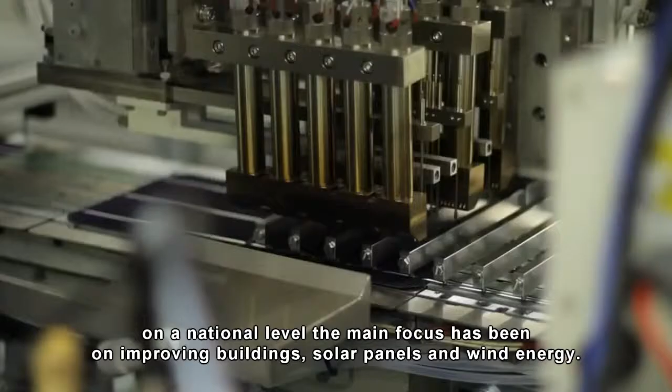In line with the Europe 2020 strategy, many local authorities made agreements to become energy or climate neutral in the future. However, as well as in Europe, on a national level, the main focus has been on improving buildings, solar panels and wind energy. The field of blue energy remains quite unexploited.

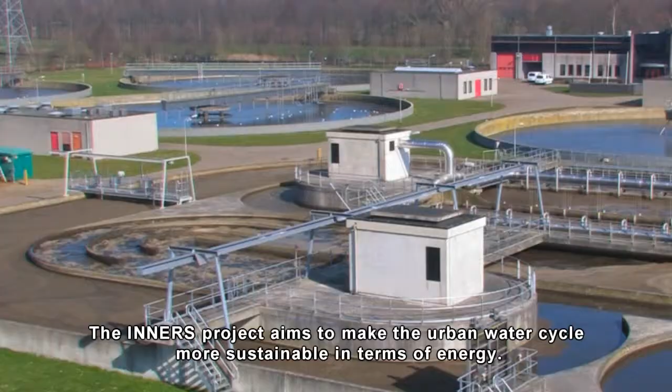The INNERS project aims to make the urban water cycle more sustainable in terms of energy. The project shows the potential of this new source of blue energy and helps to enable the water sector to deal with future challenges, such as diminishing fossil fuel sources in Europe, increasing energy prices, and stricter carbon emission limits.

The partners in INNERS started several projects to work on four main questions. What's the energy potential of the urban water cycle? How to recover heat? How to reduce energy consumption and how to reuse energy. And last, how to make the transition towards a new perspective on the urban water cycle.

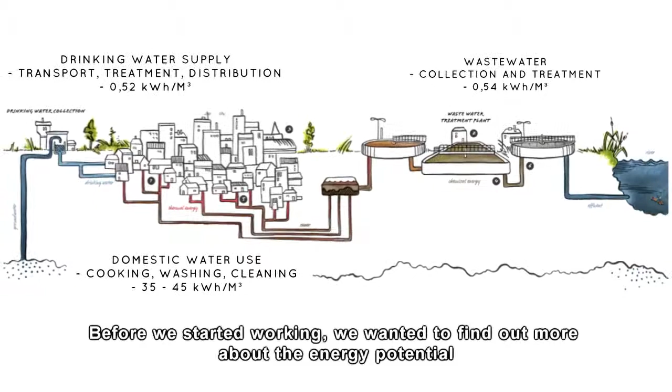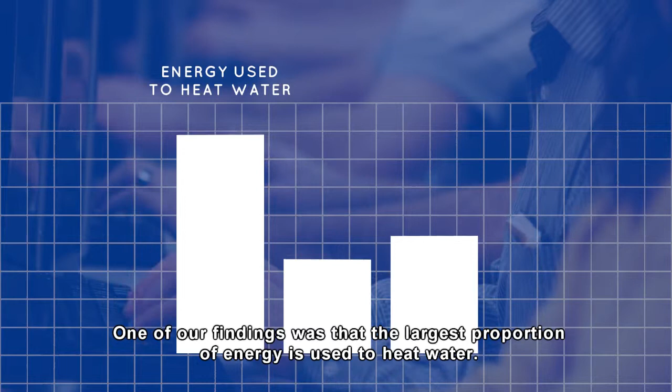Before we started working, we wanted to find out more about the energy potential of the urban water cycle, or in other words, how much is in it? To figure this out, a lot of research was done. One of our findings was that the largest proportion of energy is used to heat water. The amounts of energy needed to treat and supply drinking water and to treat wastewater are equal.

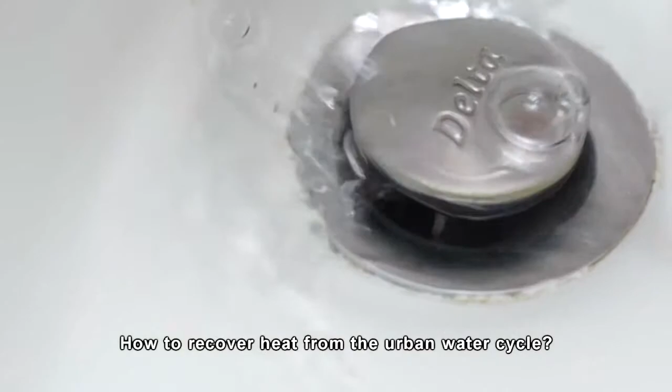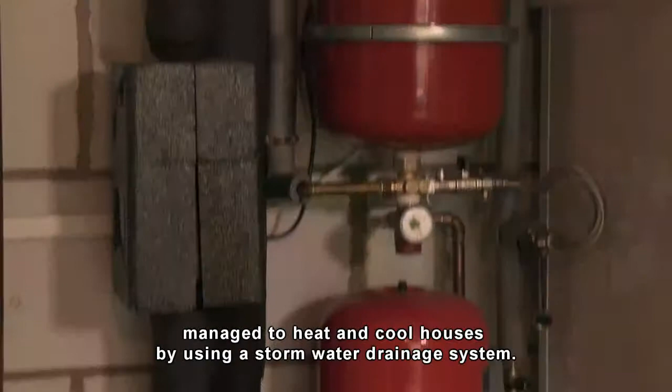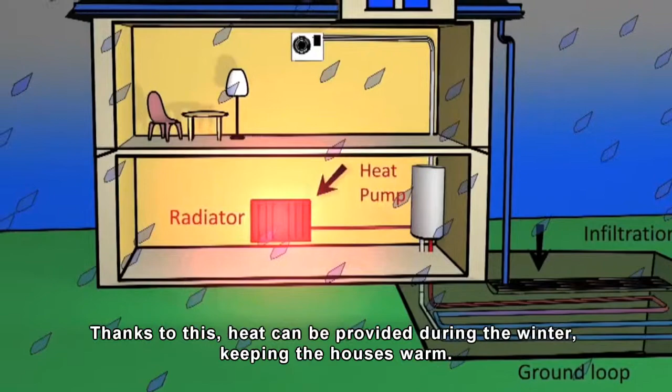Knowing this, our second question was how to recover heat from the urban water cycle. Multiple projects on heat recovery have been implemented. For example, the project of Kirklees Council and Bradford University managed to heat and cool houses by using a stormwater drainage system. Stormwater is transported through an underground heating and cooling system. Thanks to this, heat can be provided during the winter, keeping the houses warm. Then, during the summer, the system will use stormwater again for cooling.

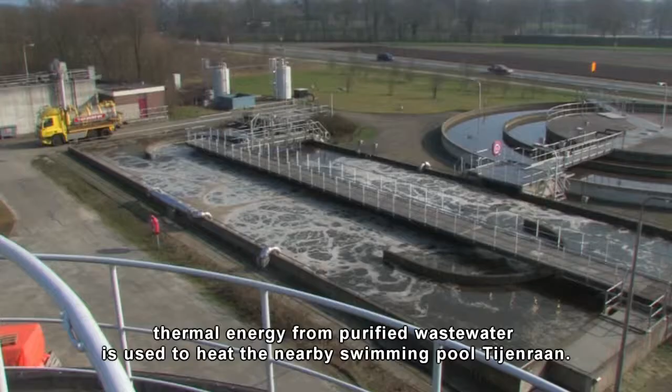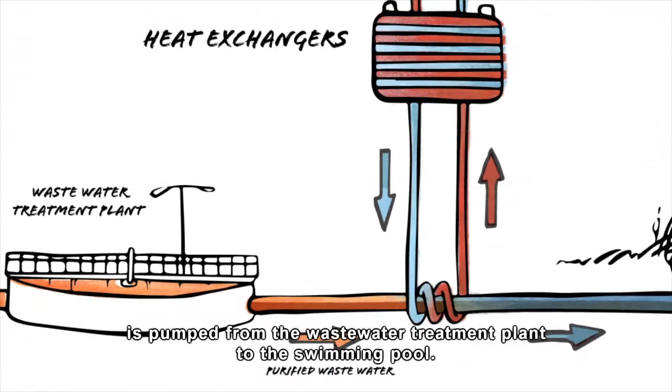In a project of the Water Board Groot Salland and the municipality of Raalte, thermal energy from purified wastewater is used to heat the nearby swimming pool of Tijenraan. Around 40,000 litres of water per hour is pumped from the wastewater treatment plant to the swimming pool. Here, heat is exchanged between the effluent and the swimming pool water. This is done with a thermal energy transfer system that includes heat pumps.

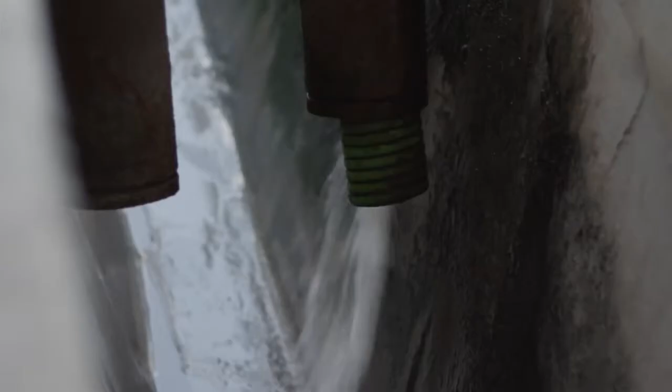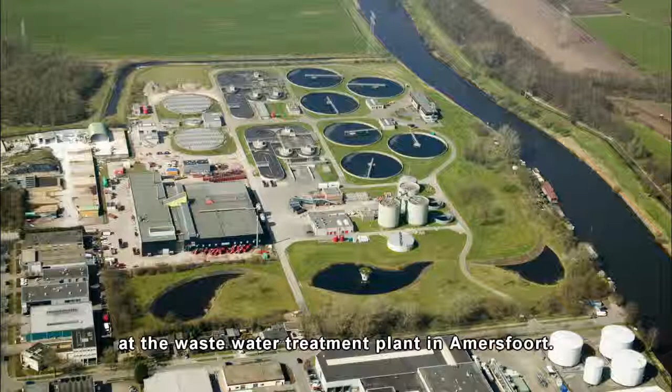Not only thermal energy was recovered, we also looked at the wastewater treatment process. Here, we asked ourselves the third question: how to reduce the energy consumption and how we can make the step towards mining of blue energy sources. In INNERS, one of these techniques has been tested and implemented at the wastewater treatment plant in Amersfoort.

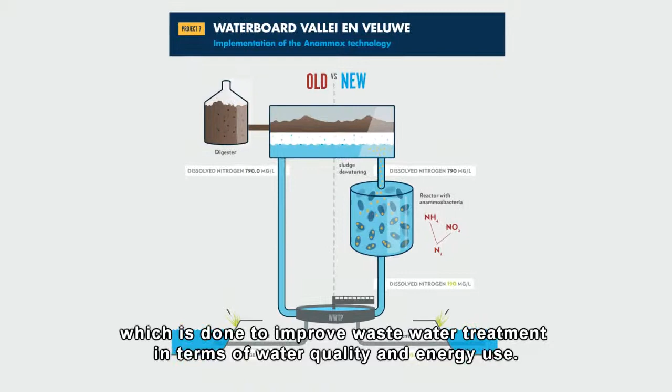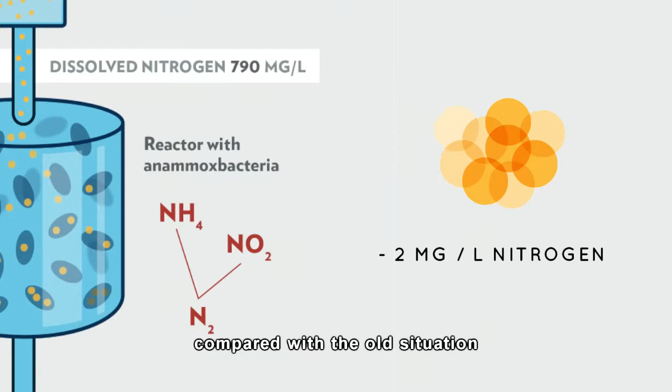A so-called demon reactor was installed to improve the process of deammonification, which is done to improve wastewater treatment in terms of water quality and energy use. Thanks to the demon reactor, the purified wastewater now contains less nitrogen compared with the old situation, and €38,000 on energy reduction costs were saved.

So far for the technical work, our fourth and final question was: how can INNERS support a transition towards a new perspective on the urban water cycle as a system that contains and transports both water and energy? We made a strategy to see how results could be transferred in the best way to our different target groups. Results were communicated in a tailor-made way, meaning short, visual and simple ones for policymakers and more detailed ones for technical specialists.

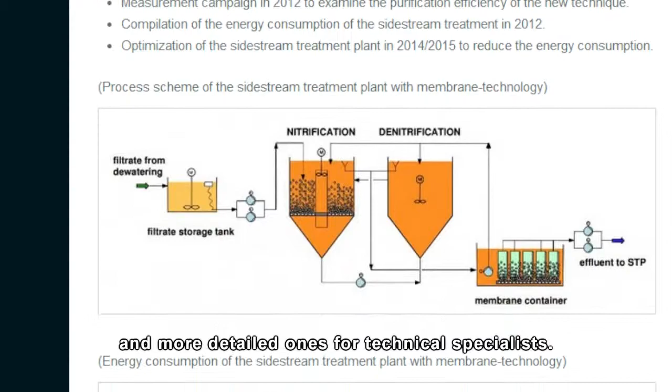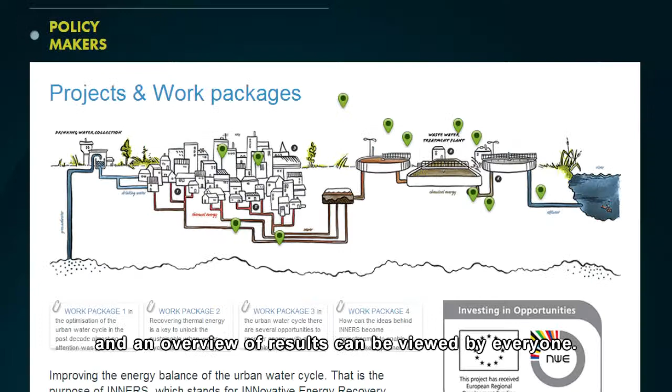On the website of INNERS, we created an overview of all the projects and the activities of the INNERS partners. A progress bar shows the development of our different projects, and an overview of results can be viewed by everyone.

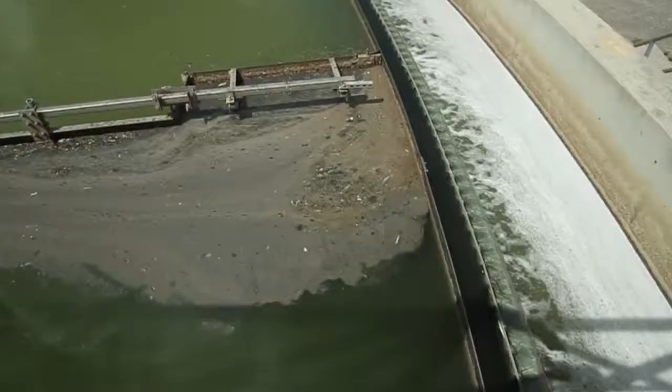During the last few years, we worked together with 11 partners from 6 Northwest European countries to improve the energy efficiency of the urban water cycle. The first step has been made and 4 main questions have been answered. However, we hope there's a lot more to come so we can really deal with future challenges. We hope we have inspired you and we invite you to join us in the future.